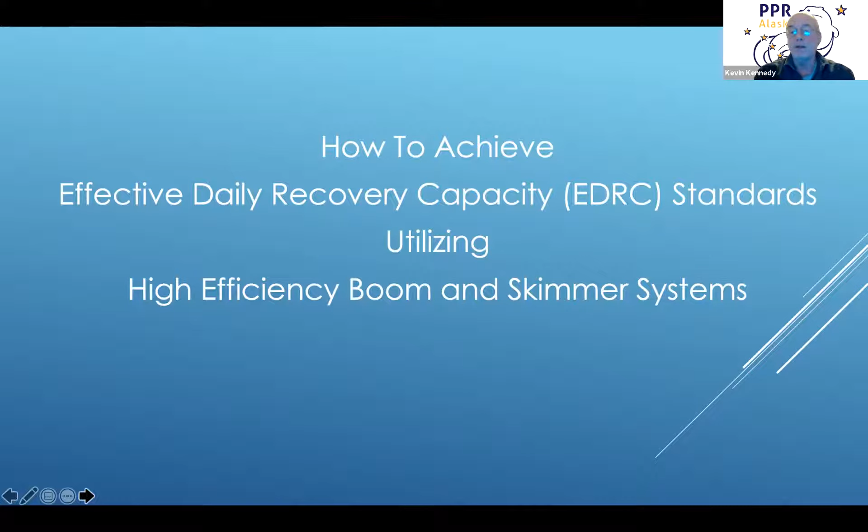One of the things that I worked on over the years was trying to connect an effective daily recovery capacity versus what's actually listed on systems, and they don't normally match up. You'll see skimmer utilizations and what they're supposed to be capable of, and actually what they do collect and skim are usually vastly different from their stated or rated capacities. So that's kind of where I'm starting with this. Next slide, please.

PPR Alaska was formed right during the Deepwater Horizon. What had happened was I had built a skimming system.

It actually goes back to the Exxon Valdez. I got out of crab fishing in the Bering Sea and went into Prince William Sound to become a shrimper because I wanted calmer waters. The opening day of shrimping season was the day the Exxon Valdez ran aground. At that point, I started using my shrimp vessel, the net that I had, and the shrimp pump to collect oil during the Valdez oil spill. And so it just kind of grew from there.

I watched how all the skimmers and boom were used during the Exxon Valdez. Fast forward 20-25 years later, I was out in the Bering Sea putting in tsunami warning buoys when the Selendang Ayu, a container or grain ship, ran aground on the north side of the Aleutian chain right outside of Dutch Harbor and broke in two. I was the first vessel on scene, and I got to be firsthand there with Alaska Chadux, and they started pulling out these same skimmers that didn't work during the Exxon Valdez oil spill. So at that point, that's when I formed the company and started trying to build a better skimmer and better boom. Next slide, please.

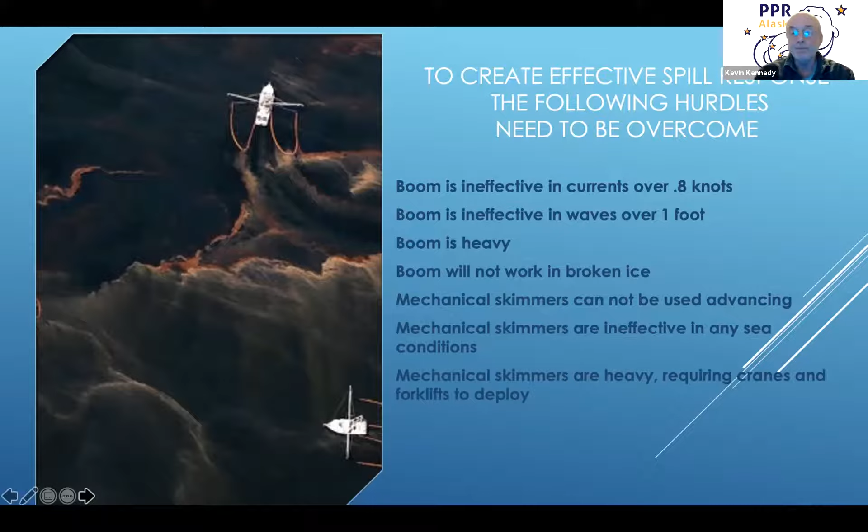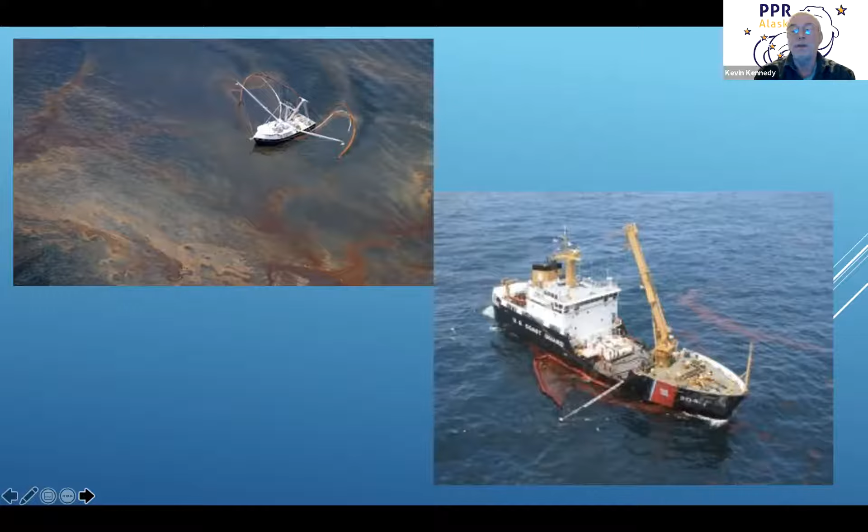These are just more pictures of the same. It's a definition of insanity -- we do the same thing over and over again, expecting a different result. Next slide, please.

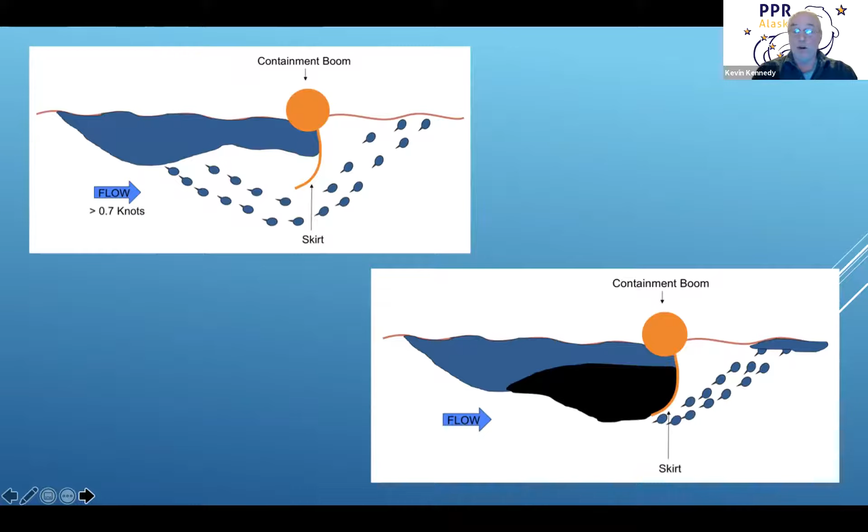So you have to start taking a look -- these are graphics done by Nuka Research, and I've worked with them quite a bit. The top picture shows what happens when you have a flow of water hitting a containment boom and the skirt, and the ending result of it. The bottom picture shows when you start to add oil to that, where it kind of leaks off. So I took a step back and tried to figure out what was causing this. Next slide, please.

So when solving problems with your booms -- I call this Boom Issues 101 because it's amazing how many people in the oil spill response business don't understand hydrodynamics. Making boom work at a speed greater than most currents encountered in oceans and rivers seems like a really easy task, or seems simplistic. But it's a little bit trickier than that. Next slide, please.

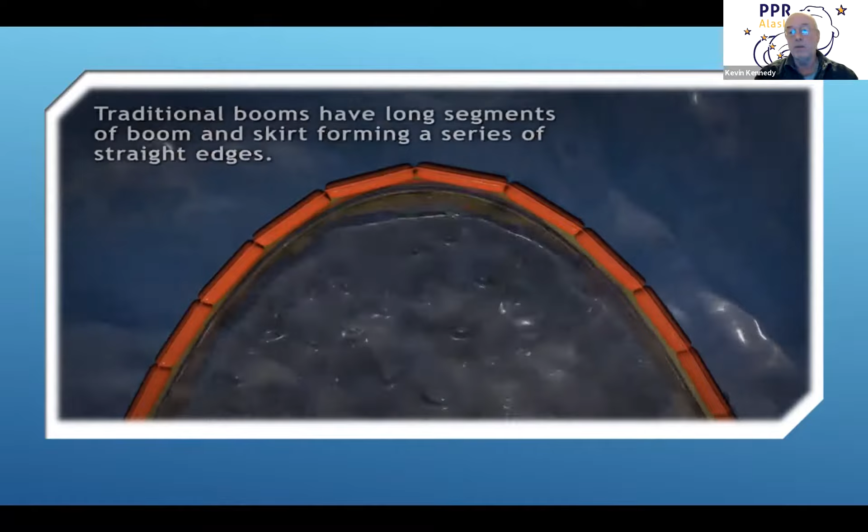This is a video that was put together with myself, Alaska Chadux, and the Alaska Prevention Marine Network. After seeing videos and working at Ohmsett, we started to see what was happening.

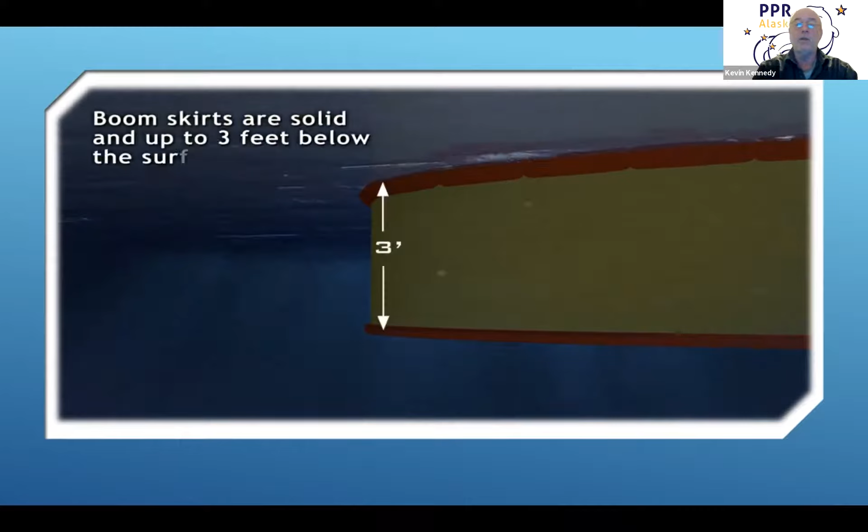When you have all this incoming, it forms a pressure wave, and that pressure wave has to relieve itself. With a typical boom, they're solid, and so that pressure wave increases.

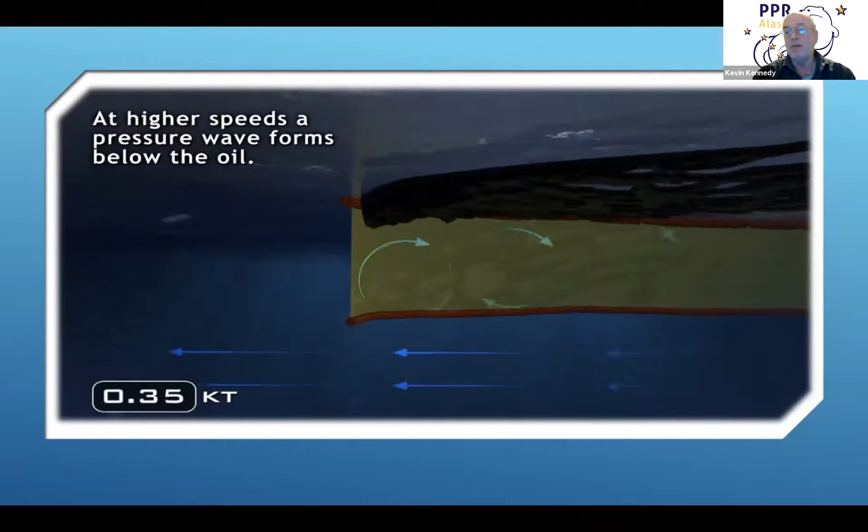As it does, it starts to pull, for lack of a better term, a vacuum to pull everything out of the inside of that boom down and underneath it. So the trailing edge starts to fail at 0.8 knots, but it catastrophically fails at 1.1 knots. In other words, it just flat out fails and doesn't hold any oil at all.

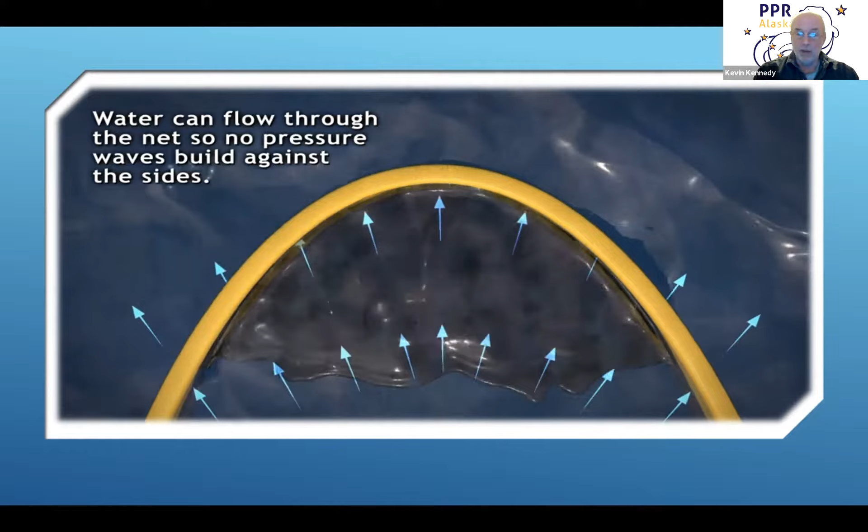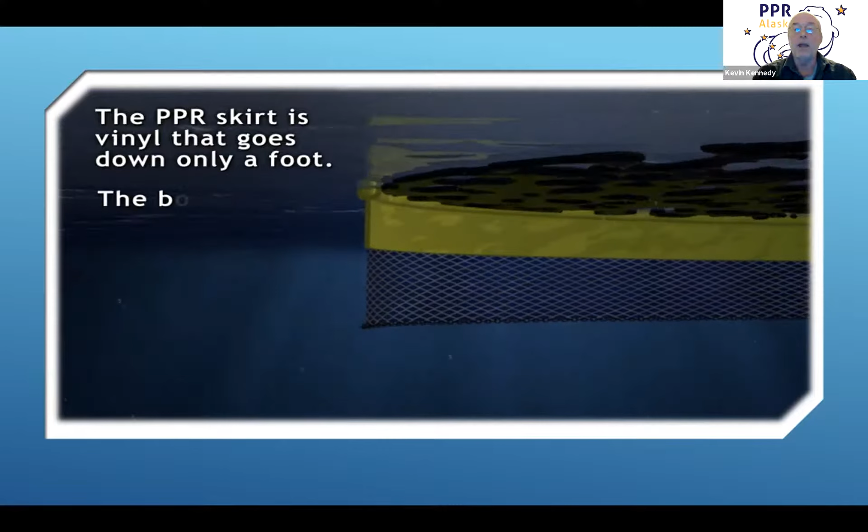So I went after this trying to design a net system and smaller floats that were more flexible. The end result was that I'm passing water through the net, and I'm not building a pressure wave to push the oil out or underneath it. Therefore, I can collect oil at a much faster speed than regular boom can.

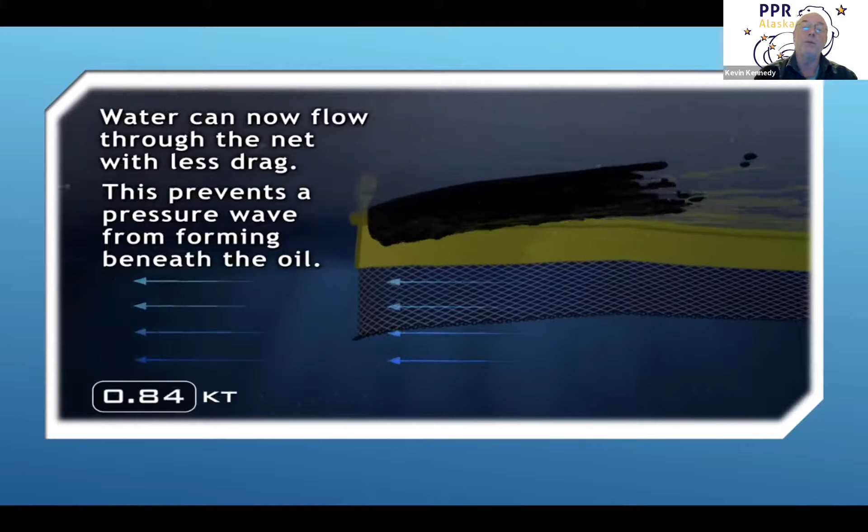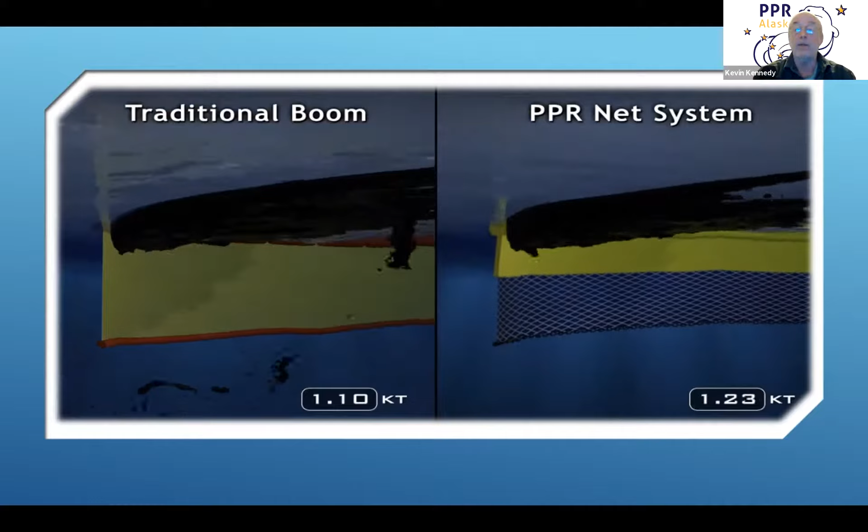So now you could start to see that you could advance nets and not have the problems that the pictures I showed earlier, the hurdles that you have. I have actually towed this net at Ohmsett in excess of 5 knots, and I've done it in the ocean at 10 knots. This is just a video graphic showing how this takes place and what happens.

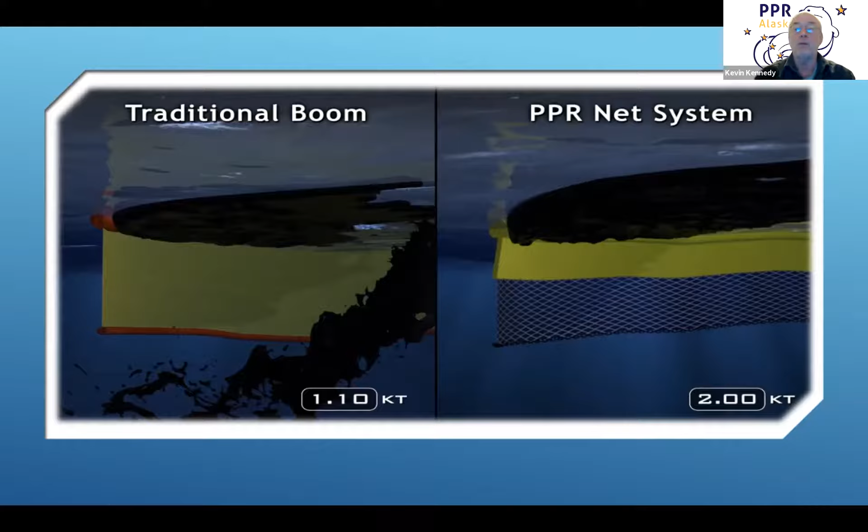The next hurdle that you have to overcome is waves. Every wave that hits a boom is also a speed differential. So not only do you have the actual roughness of the water going up and down, but each time the boom has to go up or down, it's increasing or decreasing the speed at which water and oil is hitting it.

This is also a video of that, a demonstration of what it looks like with waves. When you have a hard boom like this, it can't flex, and so it just exacerbates the problem even more. It makes it worse and worse.

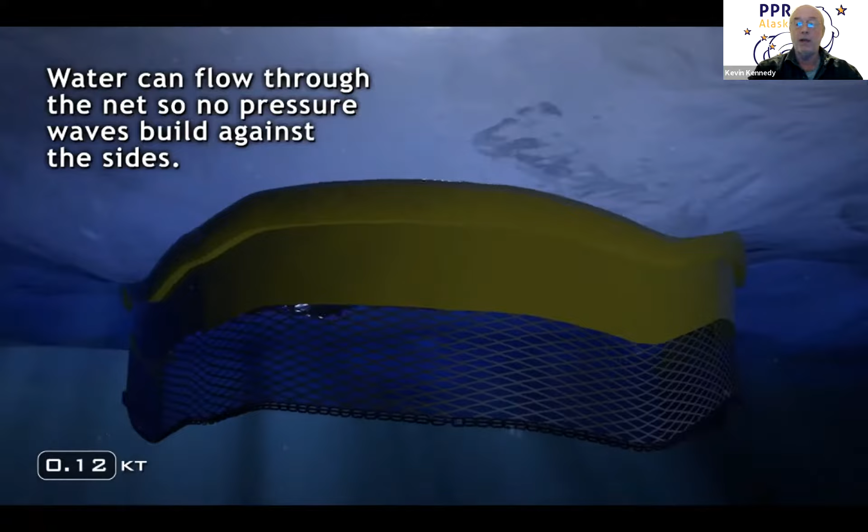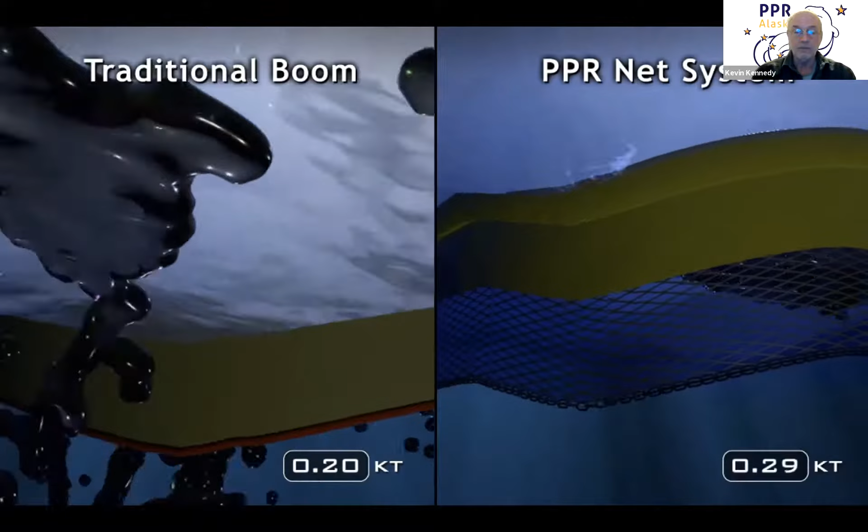In this video, you can see how everything is topsy-turvy and twisting, and when that happens, the boom has to fail to relieve all of the pressure stuck inside of it. Again, with a net, it's extremely flexible and extremely strong, but it allows everything to twist and manipulate independently, inch by inch, instead of over 5 and 6 foot lengths like typical boom, which is really stiff and doesn't bend. So those are the differences between them.

So now that I've understood this, the next step was to actually build it.

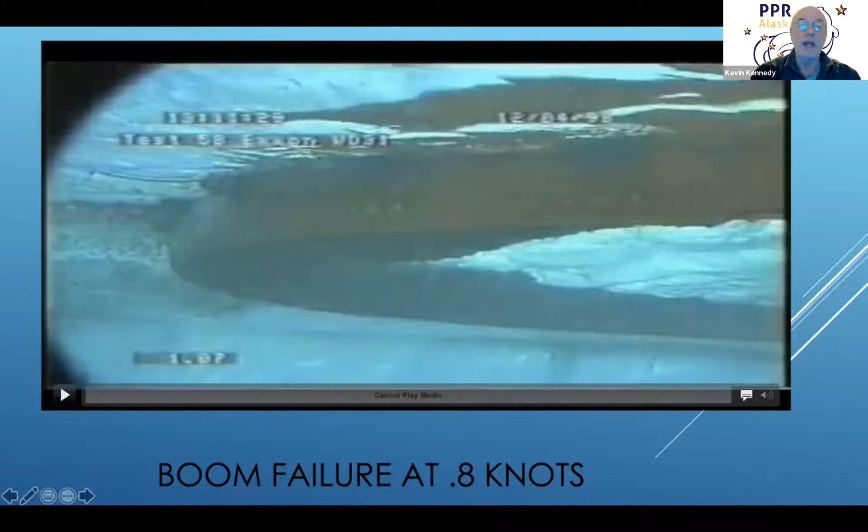This is the actual video, done by Exxon and Desmarais in '98. This is back to that quick video. It shows at what point the oil starts to just exit.

As you can see at 0.8 knots, it's starting to come out from the front. Then at one knot, and then at 1.1, it fails. This is at Ohmsett, at 2 knots.

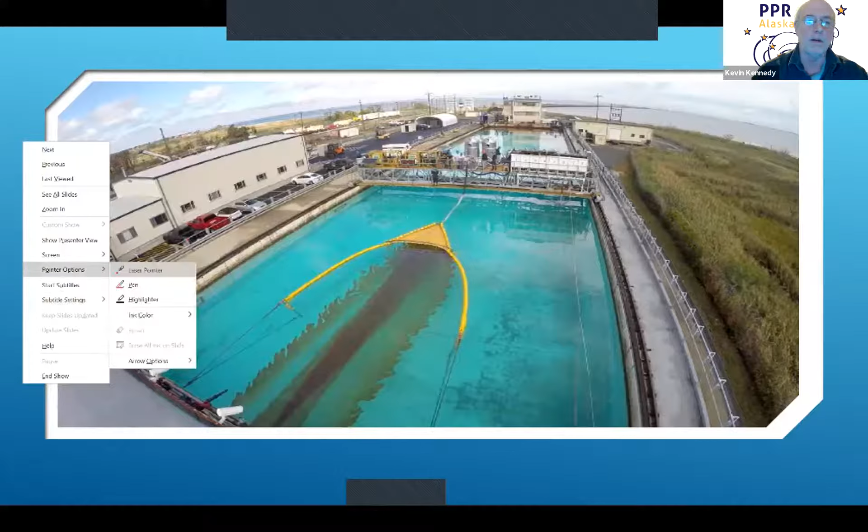This is a net. You can see right here that it's a net with chain. This was a test for the Coast Guard because they just couldn't believe that I could use a net to collect oil. So I'm not pumping any oil.

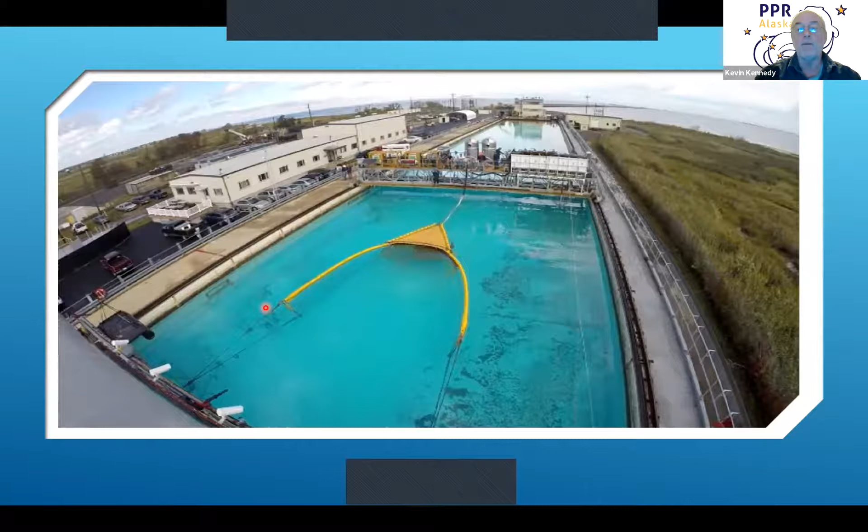They're just spraying 100 gallons a minute in front of me as we're advancing at 2 knots. As I collect this oil, you'll see it start here at the very end where it starts to come out. That's because eventually this whole pocket back here is completely full of several hundred gallons of oil. But as you move forward with a net, it creates a foil on the sides, with high pressure on one side and low pressure on the other, and it just forces the oil to the center and to an apex.

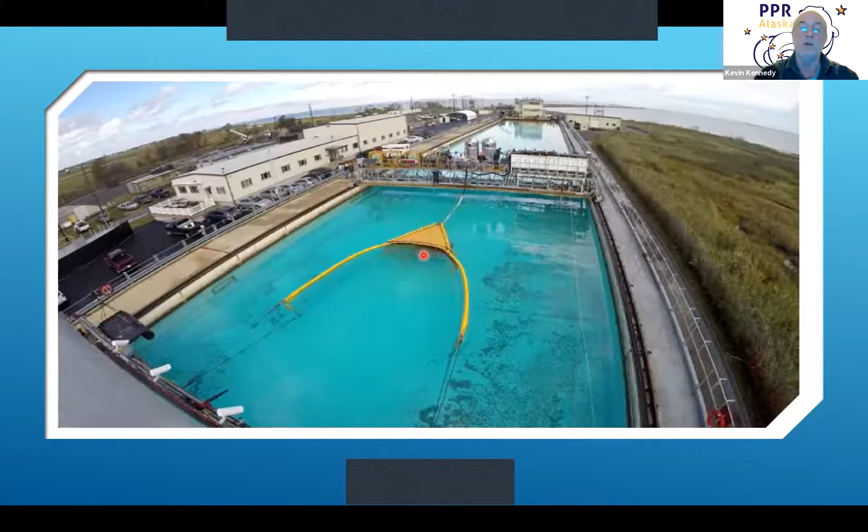So once you've gone through all of that, in order to keep the system from being overwhelmed, you have to somehow get the oil that you've collected out of it if you're in an advancing mode.

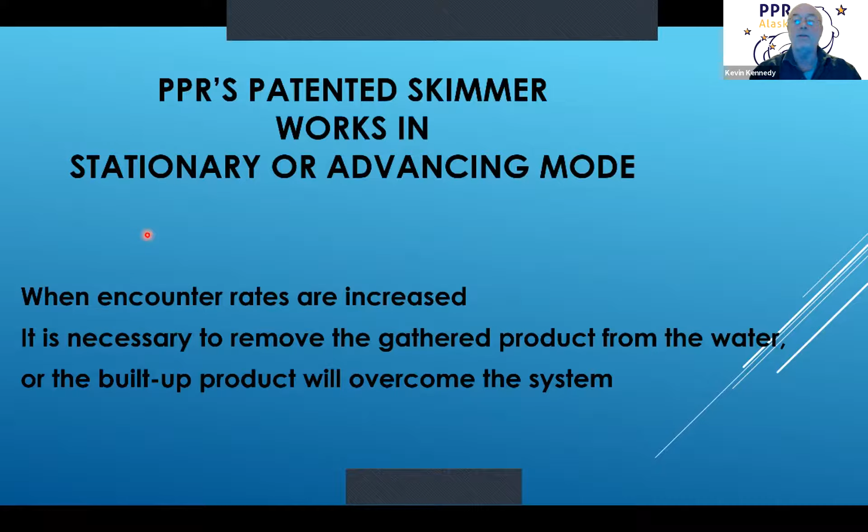So this is what we call the Sea Otter. I took a system and attached it to my net. And the way the Sea Otter works is I'm skimming off the top oil because I've now collected all that oil in the top 12 inches of my vinyl area there in the net.

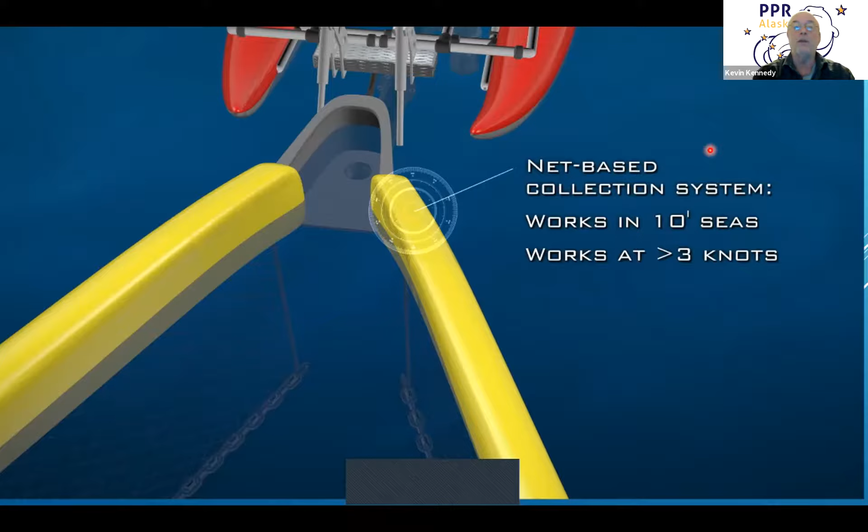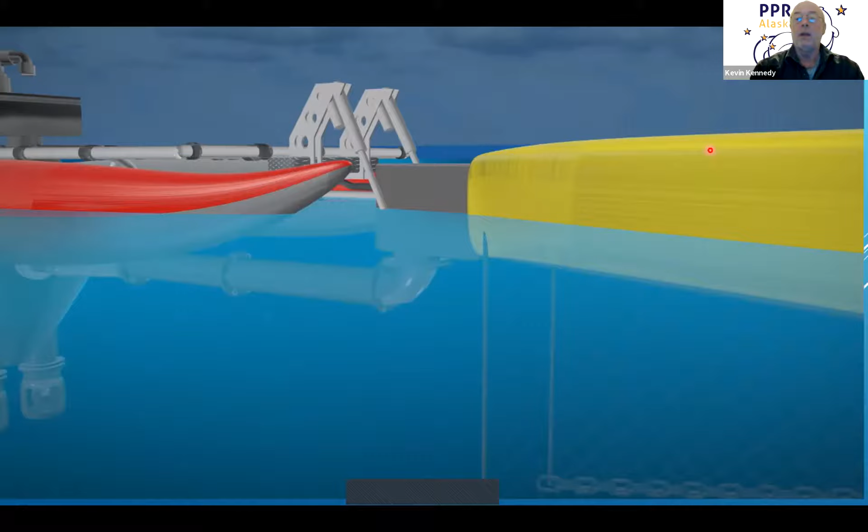And the net flexes and moves just like the skimmer will with it and follows it. And as that oil comes down the vinyl area, it enters into a suction, and I pull it underwater with a vacuum, and that enters into a chamber.

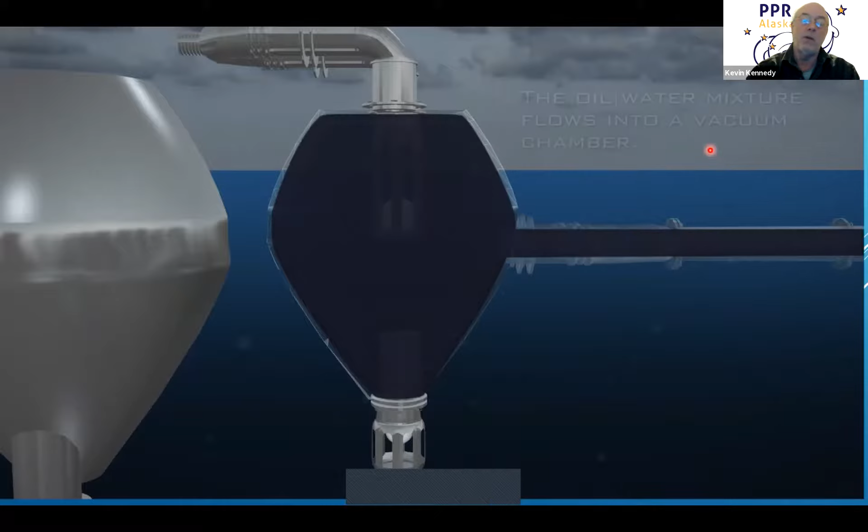And once in that chamber, it's anywhere between 20 inches of mercury and 27 inches of mercury. That's a measurement of vacuum. And it pulls that up and above the water line.

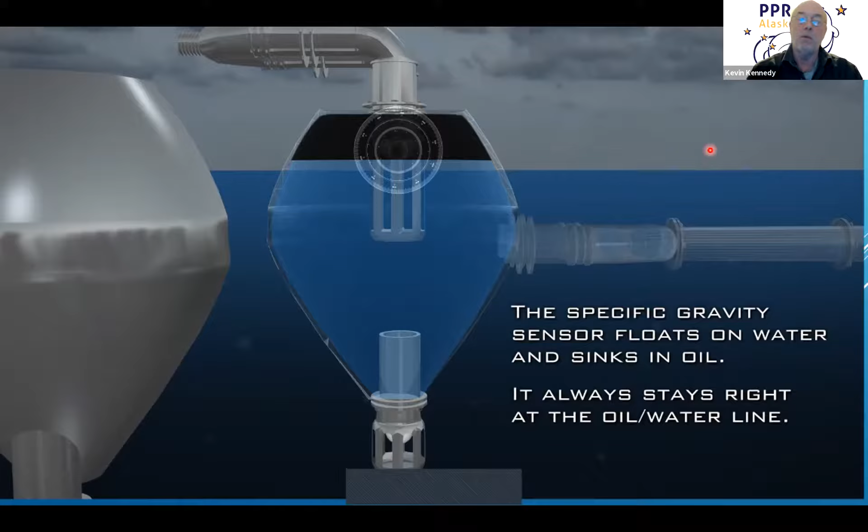Once you've pulled that oil up and above the water line, any residual water that's in it boils in a vacuum, and so it evaporates. And so all I get is just pure oil coming out of the top.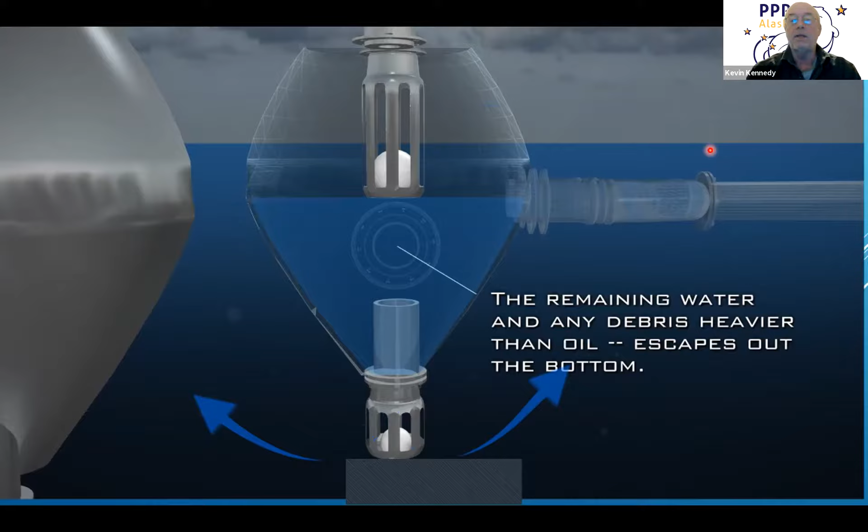Once that has run its course, this float ball that's in there comes up and it tells the vacuum pump, by a huge increase in vacuum, that there's nothing left. And I inject air back into it by atmosphere, and the water just falls out the bottom. Any residual oil never goes below the water line because it doesn't have the energy to do that.

And then it just alternates back and forth between tanks.

This is actually on Taylor Energy in the Gulf of Mexico. I wanted to go out and actually test all of the stuff instead of being at Ohmsett, in the real world. This is a 1 micron sheen.

It's a long story, but Taylor said they were leaking 4 gallons of oil a day. And we were out here collecting 40 gallons an hour off of the 1 micron sheen.

And this was just my first test on my big system. This system was capable of doing 300 gallons, pumping 300 gallons a minute.

So I then went on from there, got a phone call from up in Ashland, Wisconsin, and they were excavating creosote off the bottom of Lake Superior.

They said that they had tried many skimmers and it was so thick and heavy that it was starting to plug up all their skimmers.

So this picture on the left is just us taking the big Sea Otter out there and testing it. To the right here is to show you the scalability difference.

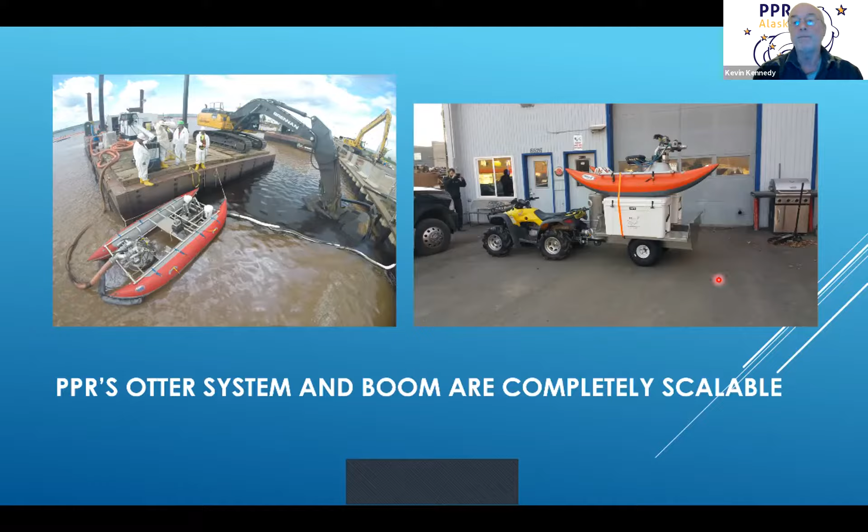These are just different jobs that I've done. The one on the left is in the Gulf of Mexico. The one in the middle screen lower is Ashland, Wisconsin.

The one on the upper right there and the tote to the right is Long Beach, California, right at the port where they were cleaning up the site from an old Navy fuel farm that was there.

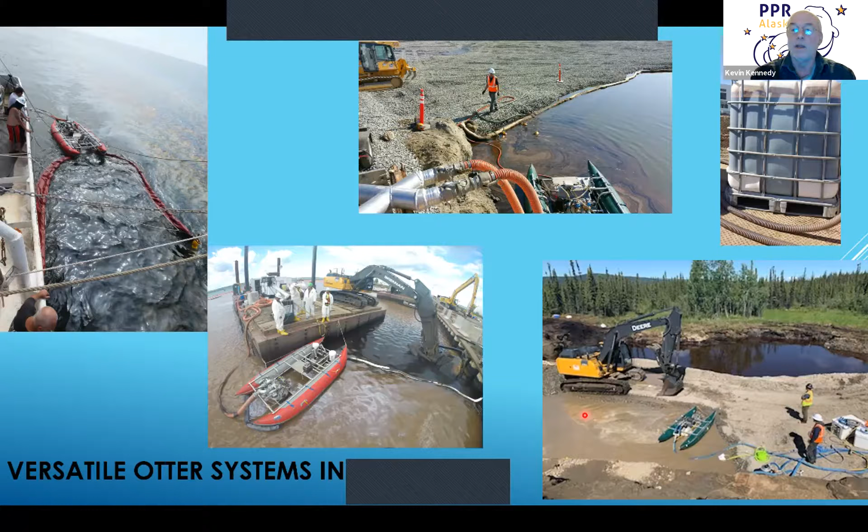And then down below to the lower right, this was a fuel pumping station from a pipeline that Canada used to send jet fuel from British Columbia all the way up to Fairbanks, Alaska.

That pipeline was abandoned, but they never emptied all of the line and they just let it break apart and rot out. Out in the middle of a swamp, 300 miles away from anything, they needed a skimmer out in the swamp.

So that was just this last summer.

I'm back to this frame because this is something that the North Slope Borough, working with myself and Alaska Chadux and the Maritime Prevention and Response Network, we are actually working on putting these skimmers now in 8 of the villages on the North Slope Borough.

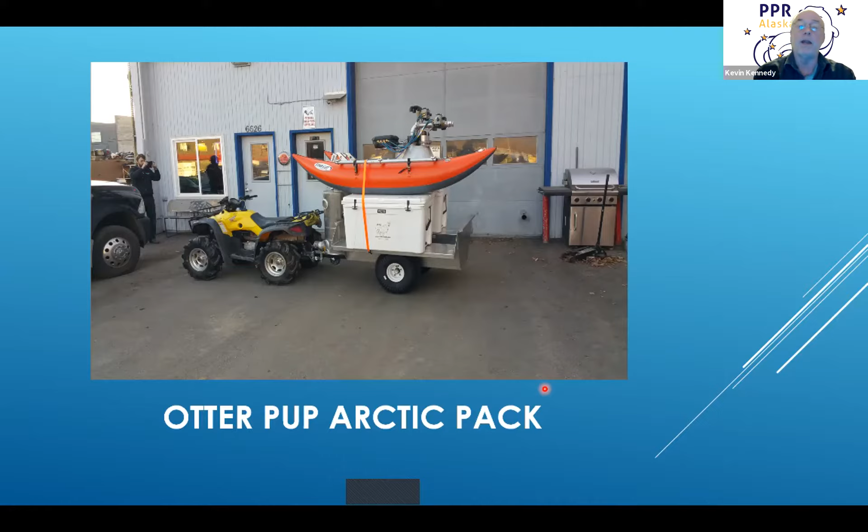We're negotiating out that contract now because, after the COVID stuff, they needed to be able to have oil spill response in an emergency without being able to fly people in. And they needed something that they could actually learn how to use, with no equipment and no docks, to get it in and out of the water on their own.

So we're in the process of putting all this together and training each village so that everyone in the village can operate this.

This is just quickly what it is. It's a 45 gallon a minute skimmer and it's been ASTM tested at greater than 99.75% oil recovery efficiency. We use bladders that quickly unfold and fill up for our recovery.

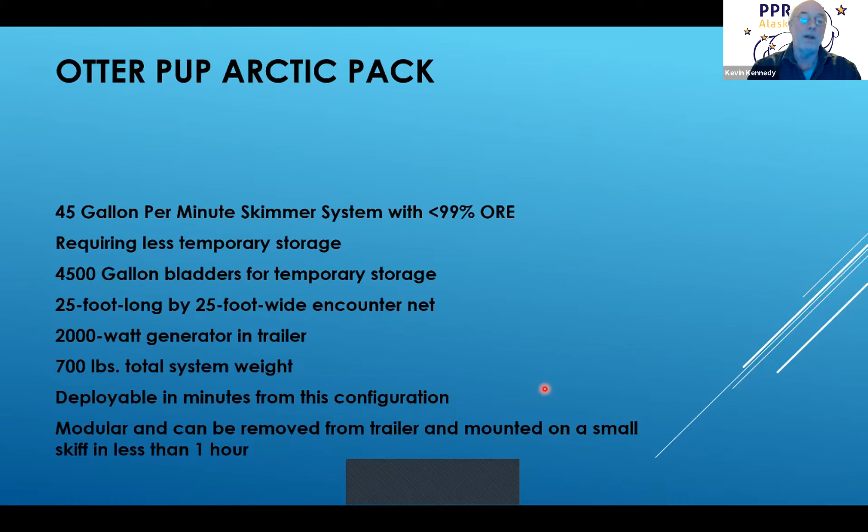It uses just a 2,000 watt generator, one of those little Honda generators. It comes with a 25-foot long by 25-foot wide net that can be run with their whaling skiffs. And the total system for the pump, the net, everything combined is 700 pounds.